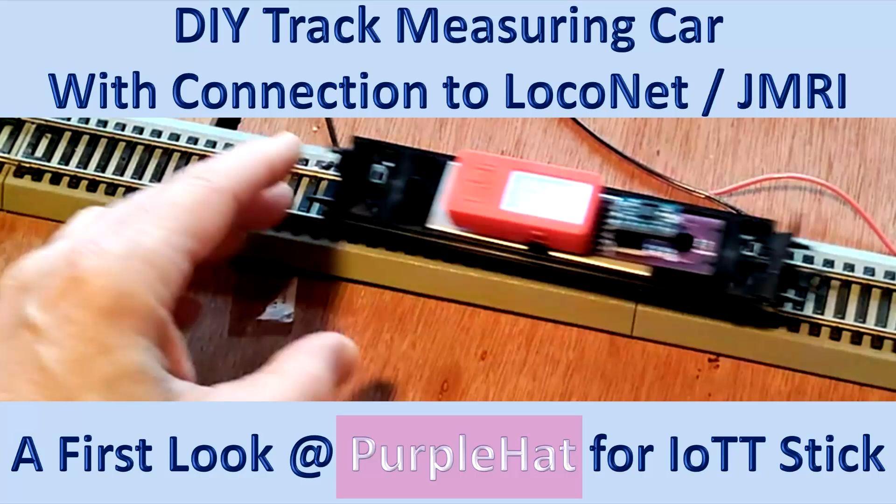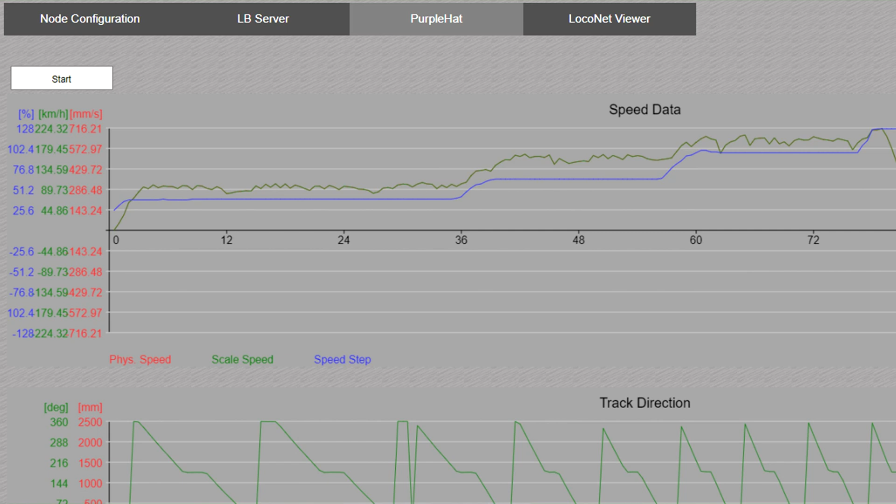I am kind of excited about how this new PurpleHat track measuring sensor for the IoTT stick is performing. In this video I show you why. And if you watch to the end, you will see what additional features are still in the makings.

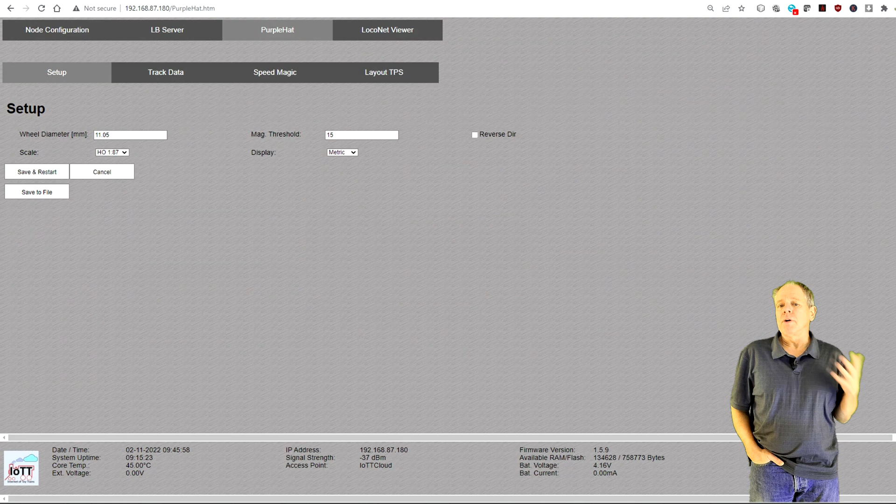I am Hans Tanner. In the last video I showed you how to install the sensor magnets on the axle of N and HO scale cars. Today I am showing you how to install the sensor inside of the car, how to configure it and what data you can get. I am using an HO scale car to demonstrate, but it works exactly the same way for all the other scales.

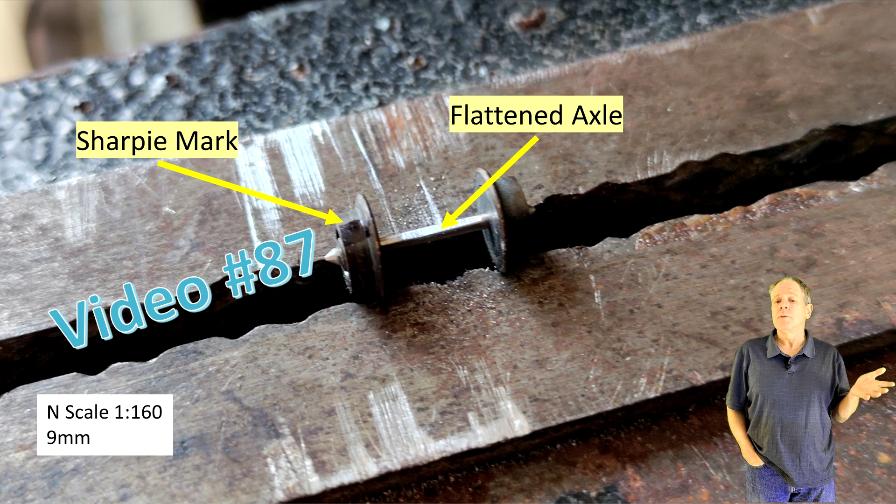If you found the installation of the magnets easy and doable, then the installation of the sensor is a piece of cake. I made this PurpleHat PCB I quickly showed at the end of the last video, where the 3D Hall sensor is soldered on. It also has the solder pads for the IMU board, but on this prototype I installed pin headers so that I can easily swap the IMU board.

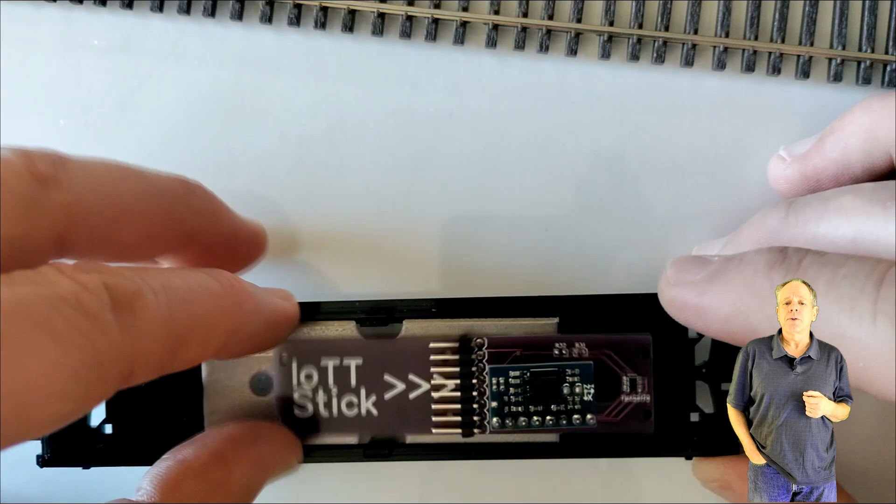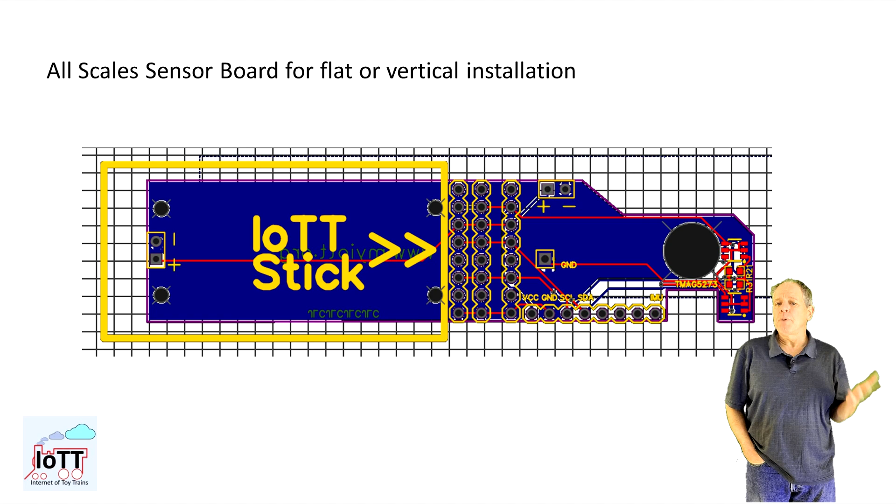To the left are the soldering pads for the IoTT hat connector, so the IoTT stick is simply connected to the hat, then placed above the axle with the magnet, and the track measuring car is ready to go. Now, in the time since the last video, I have put some more efforts into board development, and this is how the next generation of the board is going to look.

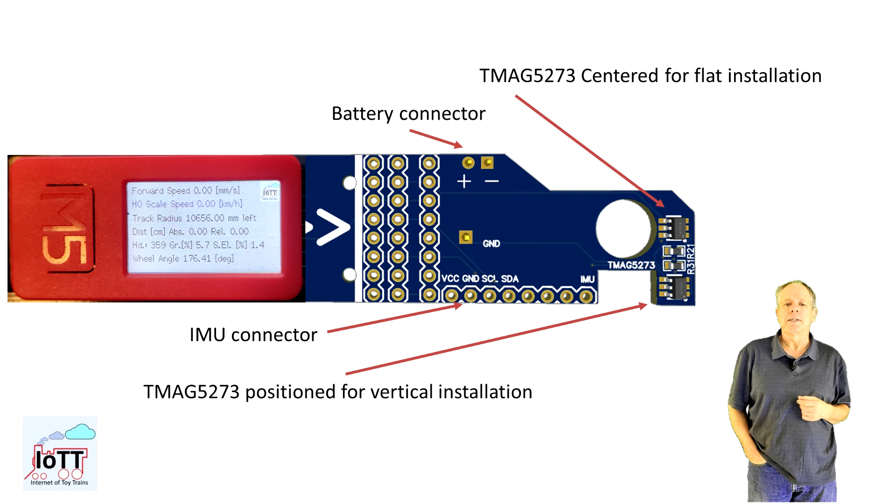The most important change is that it now has two sets of soldering pads for the Hall sensor. This allows to install the board vertically with the sensor still as close to the axle as possible. That way the board fits into an N-scale car and the IoTT stick display can be read through an opening in the sidewall of the car. But that I will show in a future video once I have the modified boards available.

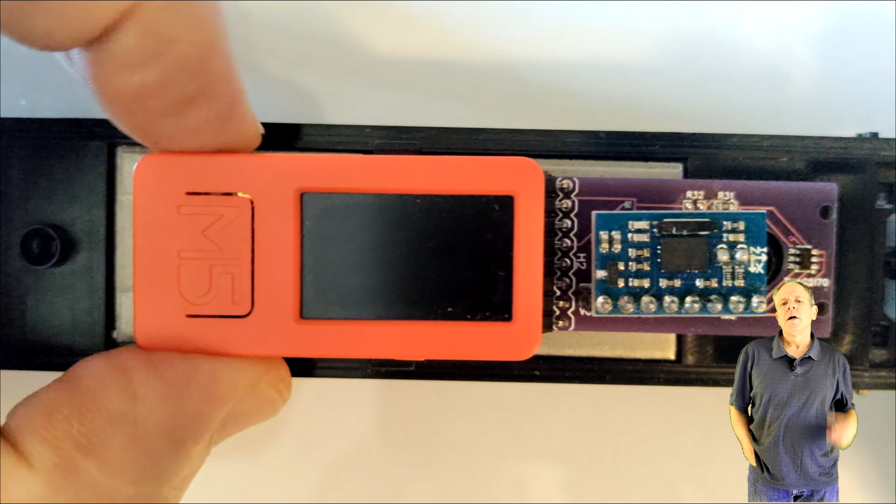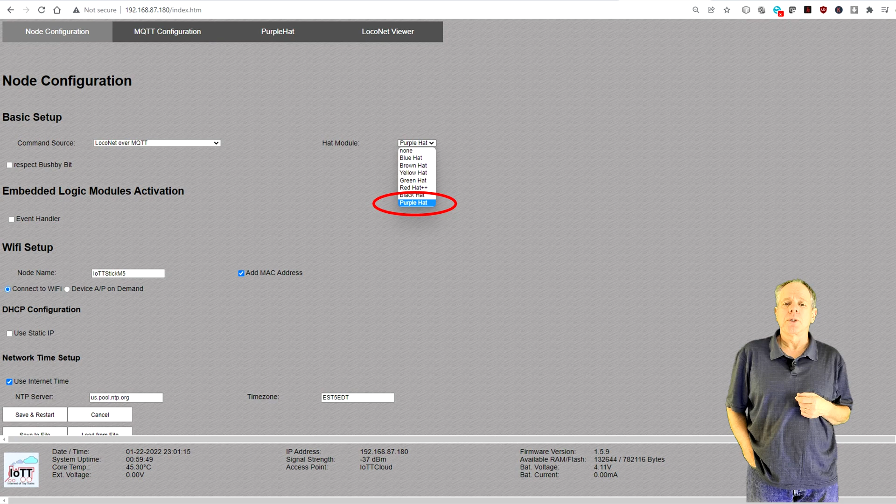Once the sensor board is installed, you can switch on the IoTT stick, connect it to your Wi-Fi or configure it to act as access point as shown in video number 42. Then you can point your browser to the IoTT stick and load the node configuration page. On this page you first select PurpleHat as your function module. Then you select the communication interface according to your setup.

With the PurpleHat you can currently use the options None, Loconet over MQTT or LocoNet lbServer Client. Select None if you want to use the PurpleHat as a standalone measuring sensor without connection to a command control system. Loconet over MQTT can be used if you have a Loconet to MQTT gateway installed that sends the Loconet commands to an MQTT broker.

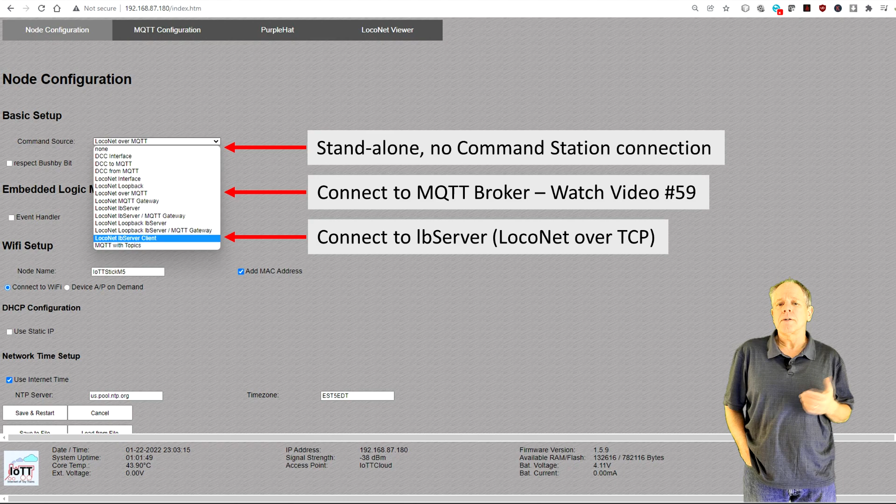The LocoNet lbServer Client option lets you connect to any LocoNet lbServer, for example the lbServer built into JMRI, or an advanced command station like the Digikeijs DR5000. Connecting the measuring car to a command station network is not necessary for basic operation, but it allows for some nice additional features I will show you in a minute.

Once you have configured the IoTT stick to use PurpleHat, the web browser will display the PurpleHat tab. Click the tab and after opening the page, the first tab on that page covers the basic setup of the sensor. Here you can set the technical details to operate the device. The first and probably most important input is the wheel diameter. Measure the diameter of the wheel of the axle the magnets are mounted on and enter it in this field. The dimension is always metric, even if you configure the stick to display imperial dimensions.

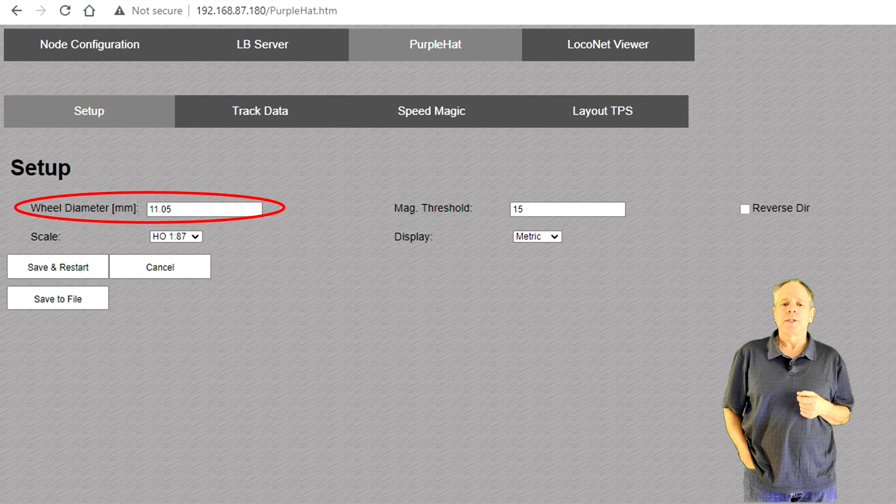The best way to measure the data is using calipers and measure the wheel directly. Since the running surface of the wheel is conical, the best place to measure it is about halfway between the start of the flange and the outer side of the wheel. Keep in mind that the wheel diameter is used to calculate the travel distance of the car, so setting a correct diameter directly impacts the precision of the distance measurement.

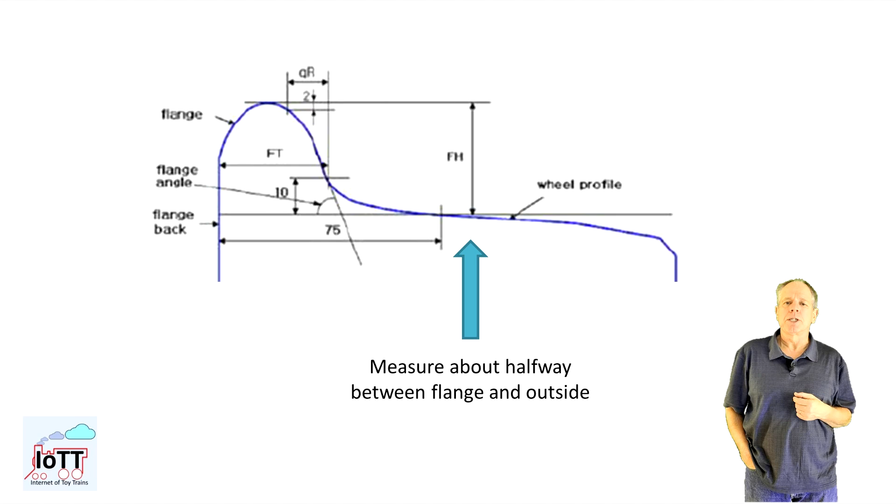The second entry is for the magnetic threshold. Depending on the strength of the magnetic field, the measurements oscillate around the true value, even if the car is not moving. This oscillation would be interpreted by the software as constant small movements and change of direction. To avoid that, the threshold allows for specifying a rotation angle that needs to be surpassed before the sensor is interpreting it as a change of the travel direction of the car.

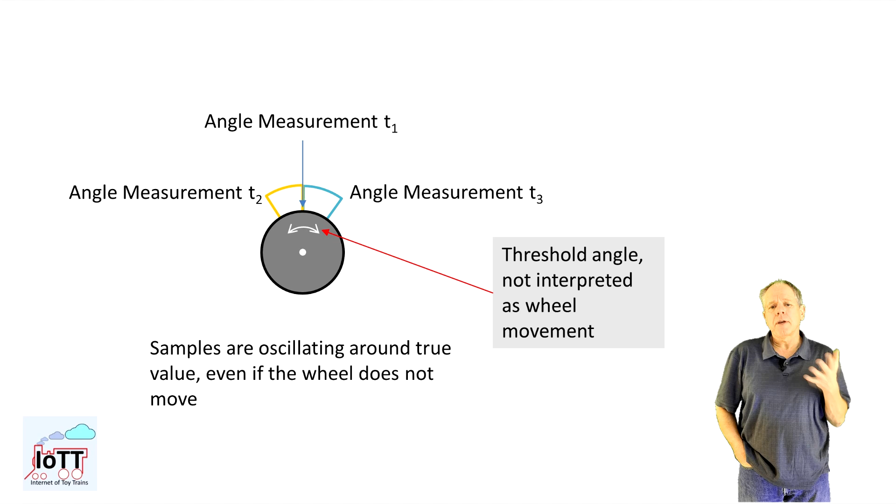So, the stronger the magnetic field, the less oscillation and the lower the threshold value can be set. Very weak signals cause wider oscillation of the measured value, and therefore the threshold should be set to a higher value. Based on my tests so far, 15 might be a good starting point for most applications.

But if the car is not moving, but then still continuously displaying changing speeds, you should try to increase the threshold value to make the sensor less responsive. This might be a good time to have a quick look into the software algorithm that performs the distance measurement. If you are not interested in that technical stuff, simply skip to the next section.

The TMAG 5273 can do up to 1000 measurements per second, but it also offers the possibility to average the results of several measurements and read it out less frequently. I have set it to average the last 32 readings, which already eliminates a lot of the typical oscillation. In turn, the maximum sample rate is down to 400 readings per second, which is still more than what I do. The stick is configured to read the angle every 5 milliseconds, so 200 times per second.

I then compare the new angle to the previous one and determine how much the wheel has turned. This is multiplied by the wheel diameter times pi, which gives me the travel distance, and divided by the time between two readings, the speed. So I get a new speed reading every 5 milliseconds, which then gets smoothened over half a second, which is then the result that is displayed.

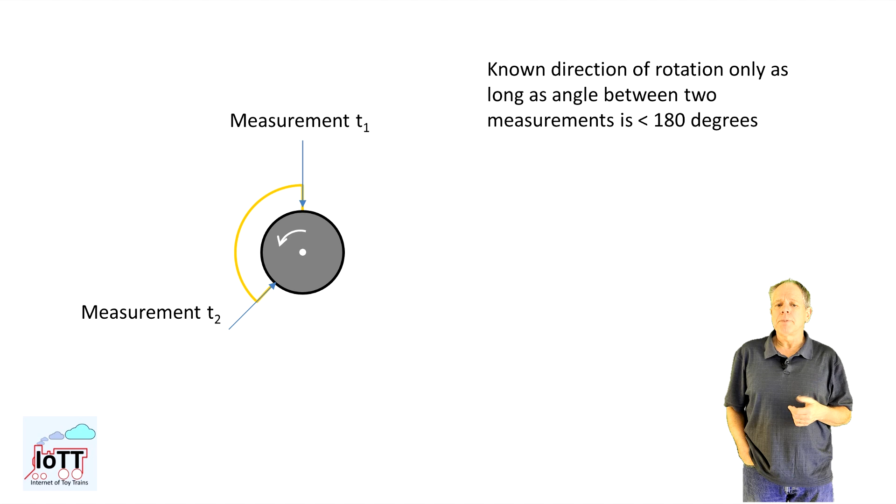Now the interesting question is, how fast can the car travel and still provide an accurate measurement? Well, to reliably detect the speed and direction of the rotation, the angle between any two measurements must be less than 180 degrees. And with the typical reading errors, I think the measurement is reliable as long as I have 3 or more samples per revolution, which gives a minimum time of 15 milliseconds per axle revolution, or about 67

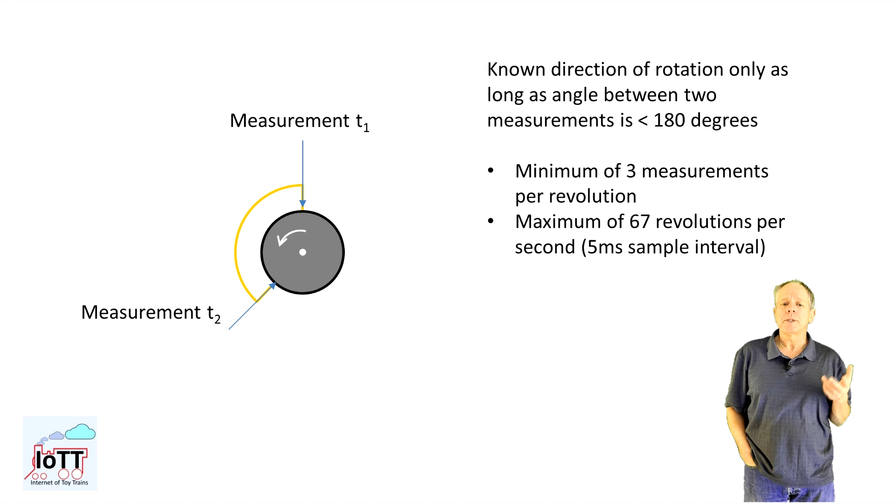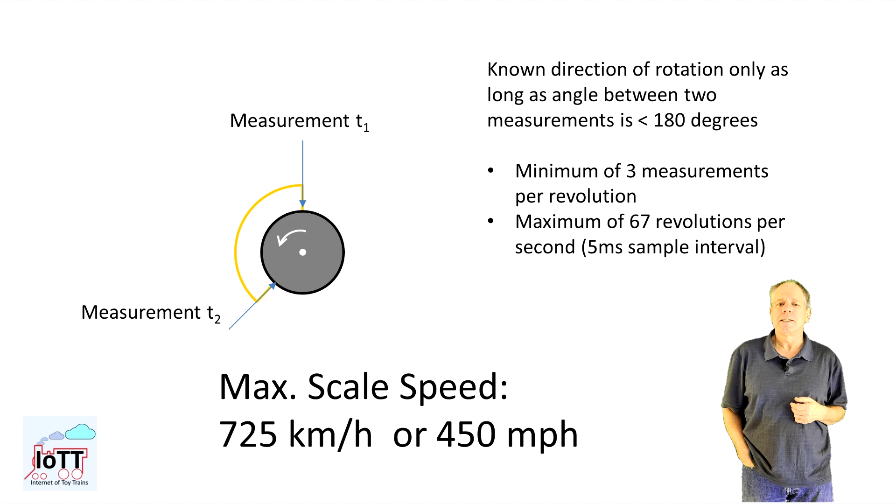revolutions per second. With a typical wheel diameter of 11 mm in HO scale, this is equal to a speed of about 2300 mm per second, or converted to scale speed, about 725 km per hour or 450 miles per hour. So this should be enough even if you are modeling the German ICE railway system. And with that, back to the configuration screen.

The reverse dir checkbox lets you change the travel direction the car interprets and displays as forward moving. You can use this to synchronize the indicated direction with the direction the locomotive is traveling. Of course, alternatively, you could simply turn the car 180 degrees for the same effect. It's up to you. On the second line, you have the drop-down boxes for scale and dimension. Select the scale of your application from the list.

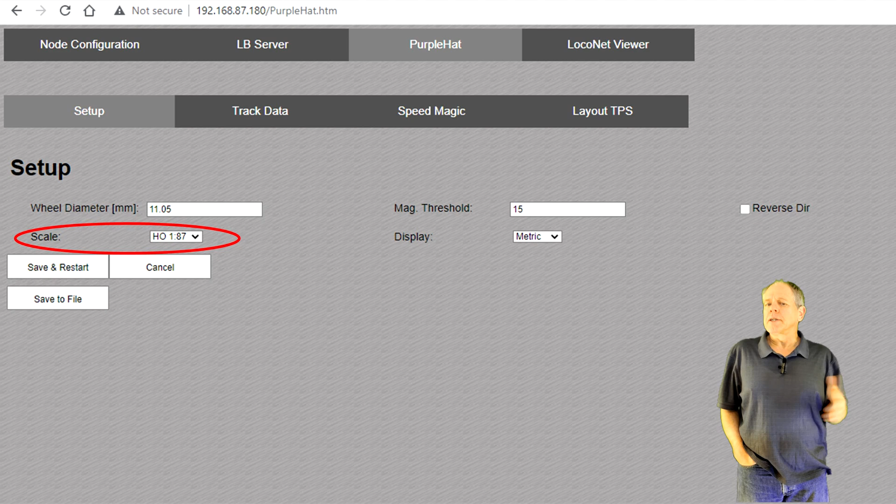The information is used to calculate the scale speed based on the physical speed as measured by the sensor. So if you set this to HO, the physical speed as measured is multiplied by 87 and then converted to either kilometers per hour or miles per hour, depending on the selection you make from the dimension drop-down list in the next field. And that's all the settings you need to make to configure the sensor. Click Save and Restart to make the changes permanent, and you are ready to roll.

If you now check the display on the stick and use the main button to rotate through the different pages, you get to a page that shows all the sensor measurements for speed, distance, heading, grade and super elevation. If you are using a regular stick C, that's it. In case you are using the newer stick C+, you will get an additional line that has the current rotation angle of the measured axle.

This allows for very fine measurements of the movement, but it requires the larger display of the stick C+ with higher resolution. Another advantage of the stick C+ is the higher battery capacity. With the stick C+, you will be able to operate the sensor with activated Wi-Fi for about half an hour, while on the regular stick C you will only get about 15 minutes before it needs to be recharged.

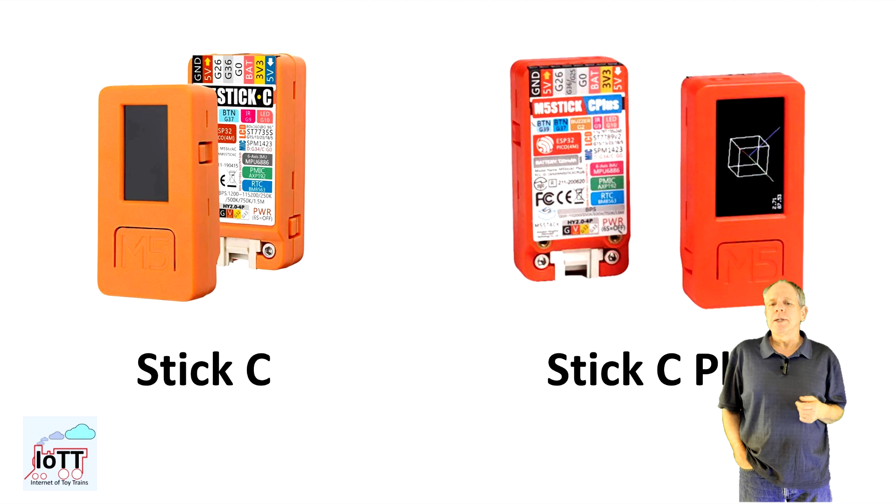For this reason I have added a battery connector to the latest PCB version so that a small lithium-ion battery can be connected to the board. For my tests I was adding a 450 mAh 3.7 volt battery and got a runtime of about 6 hours, which should be sufficient for most applications.

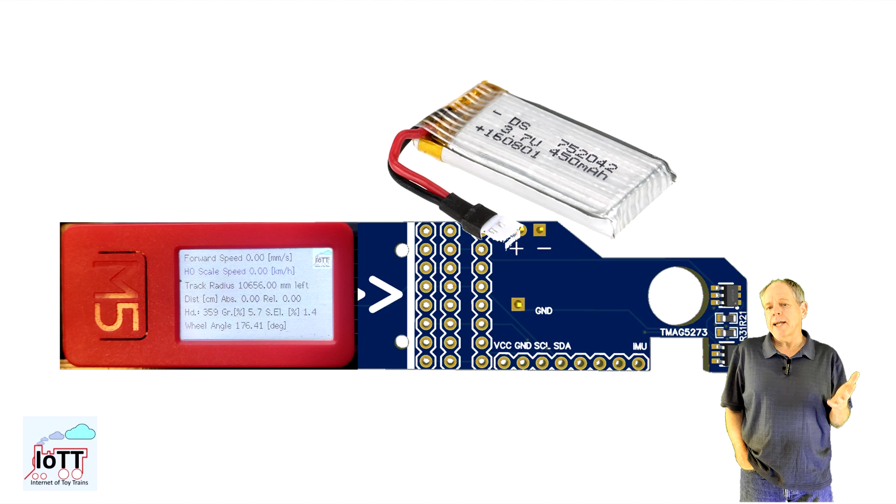And finally, it is also to say that M5 Stack, the company who makes the stick C, has now completely switched to the Plus version and does no longer make the regular stick C. I have currently 2 or 3 left, and after that I will also only sell the stick C+.

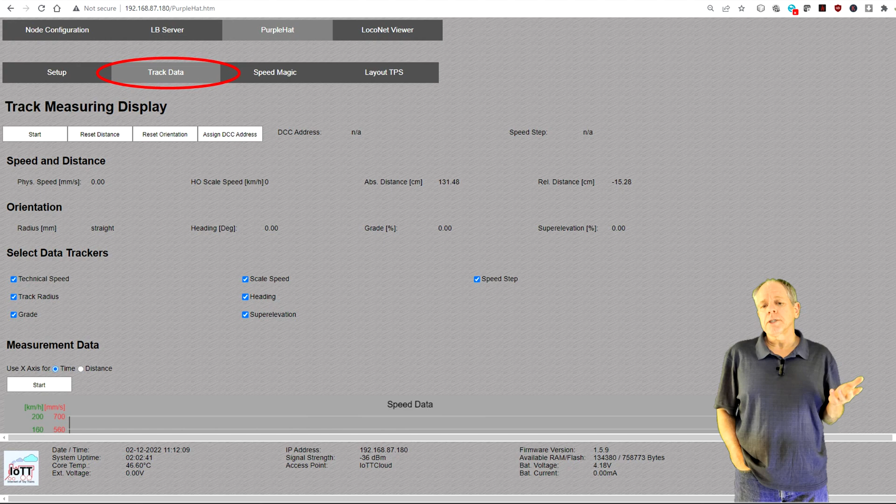To see the results in the browser instead of on the stick display, open the Track Data tab. Here you first have 4 buttons to control the sensor data flow. The Start button is used to start and stop the data display in the browser. Note that the sensor keeps measuring in any case, and the current data is always displayed on the stick display.

The Start button only controls the transfer of data to the browser display so that you can stop the flow to study the data in detail. The next 2 buttons allow you to reset the display on the fly.

Reset Distance sets absolute and relative distance to 0. Reset Orientation, on the other hand, resets heading, grade and super elevation. Note that this is basically just setting the values for what the IMU considers north, flat and level based on the current position, so it impacts the display of heading, grade and super elevation.

The final button lets you make a connection to the locomotive that is pulling the measuring car. Click the button, then issue a speed or function command from your throttle to the loco address and it gets paired with the PurpleHat via LocoNet if LocoNet is selected in the node configuration.

If the sensor knows what loco address is used for the train, it can display the speed step that currently is set in the locomotive. That's what you see in the next 2 fields, the assigned DCC address and the current speed level of that address. The next section shows the speed and distance information.

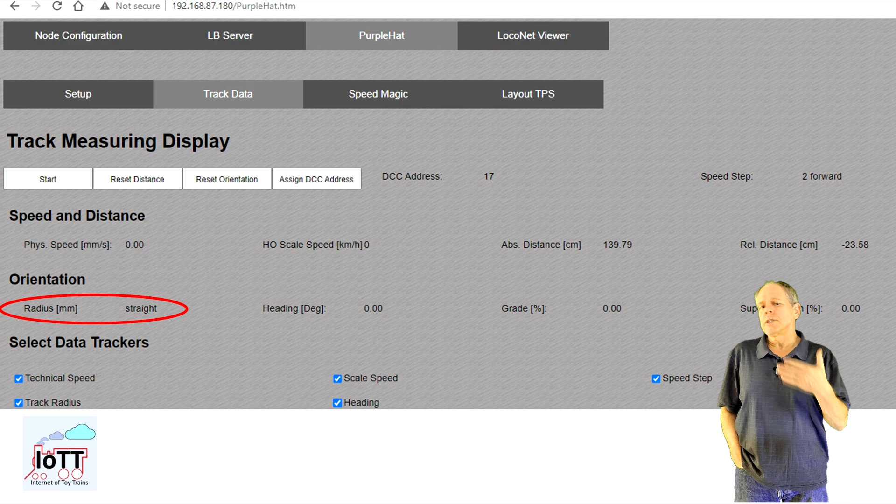The next section shows curve radius and orientation of the car. If the car is traveling through curves of more than about 7 feet radius, the display shows straight. If the radius is smaller than that, it is displayed in this field. Heading shows the current travel direction, with 0 being the direction the car was in when the sensor started up or when the reset orientation button was clicked the last time.

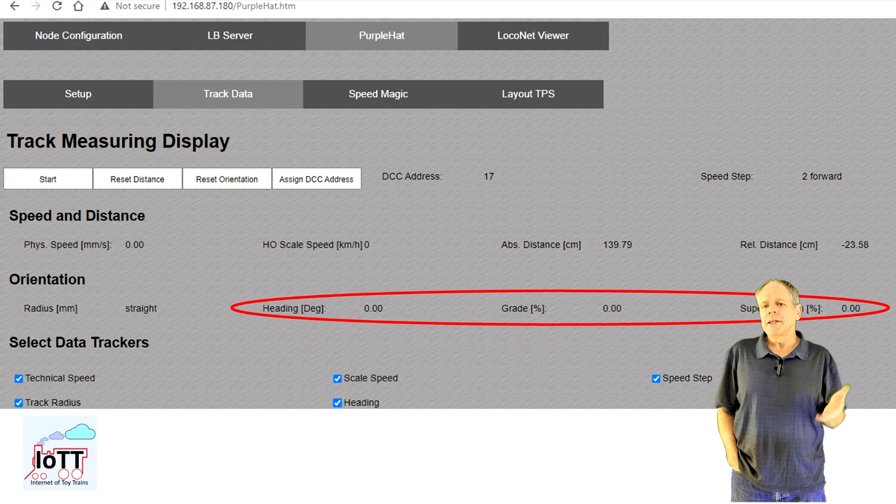Grade shows the grade of the track, positive numbers if it is climbing and negative numbers if the car is moving downhill. And super elevation shows the banking, with positive numbers if the track is leaning to the right and negative numbers the other way around. Like the grade, these values are always related to the current travel direction.

That is basically all the data the sensor can measure, and all there is in the lower half of the page is the graphical display of the same data, and you can use the checkboxes to select or unselect individual line graphs. The first box has physical speed, scale speed and speed step as measured during the last 120 seconds.

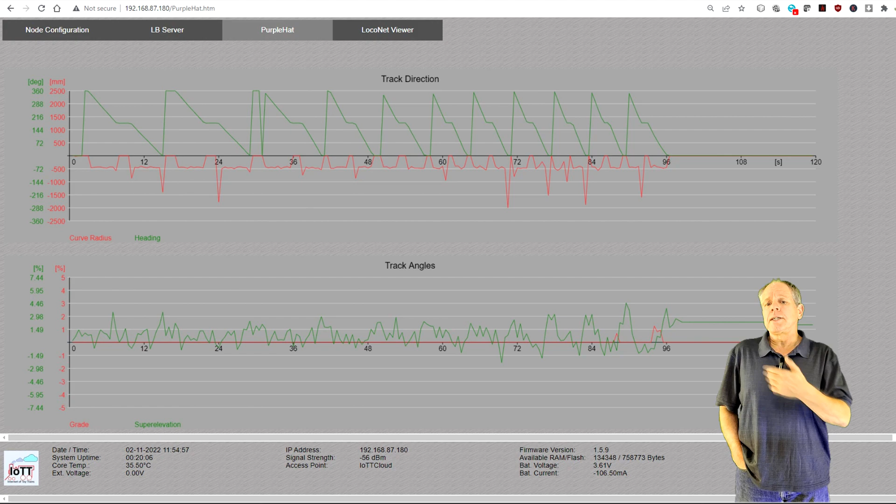The second block shows curve radius and heading, while grade and super elevation are shown in the third set of line graphs. Note that the second two blocks are only available if the sensor is equipped with an IMU. Without an IMU, the sensor can only measure and display speed and distance data. So let's see what we can get when we operate the sensor.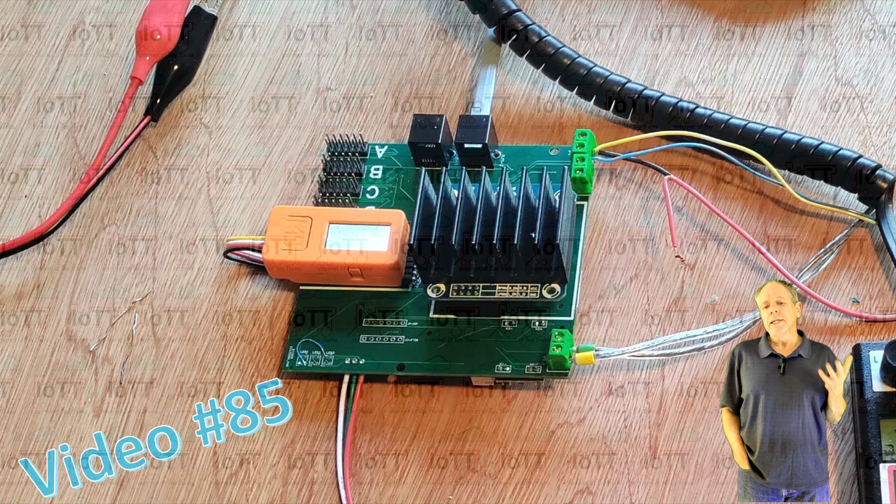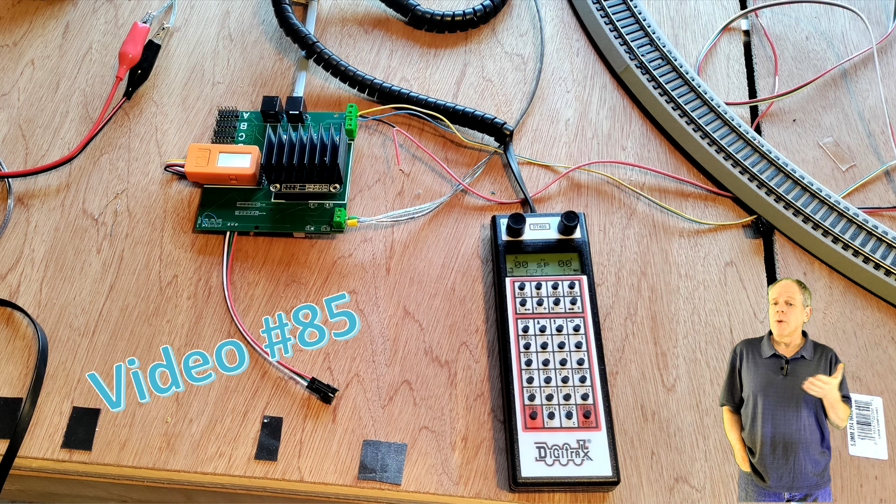For this test I am using the Red Hat command station prototype I introduced in video number 85, which makes the DCC++ Arduino software a LocoNet command station. To control the locomotive, I am using a Digitrax DT400 throttle.

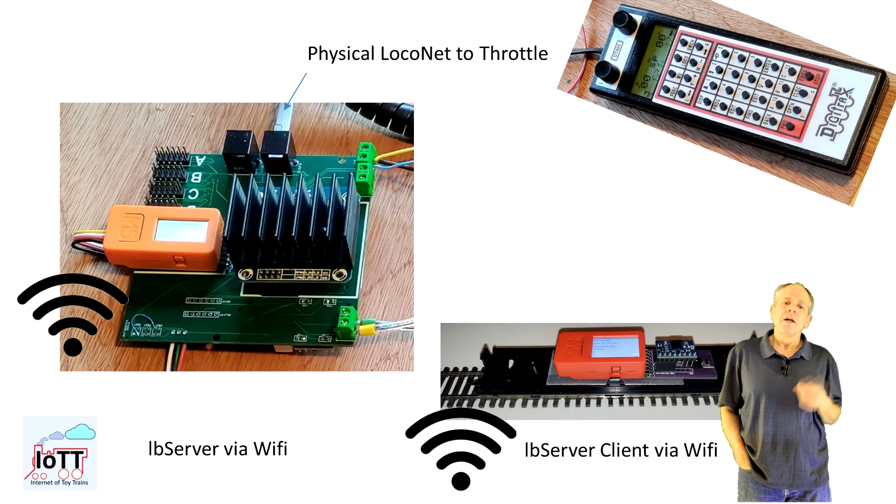The command station communication is configured to LocoNet LB server, so it provides a physical LocoNet for the throttle and LocoNet over TCP. The PurpleHat sensor is configured as LocoNet LB server client and connected to the server of the command station, so it receives all LocoNet commands via Wi-Fi. First, I assign the locomotive address by clicking the Assign button and then turning the knob on the handheld throttle, and the address is assigned and displayed.

The track is a simple oval using Bachmann EasyLine track. The curves are using 18-inch radius sections, and the straight parts consist of 3 track pieces of 9-inch each. So the nominal length of the track is about 167 inches or about 4 meters and 24 centimeters.

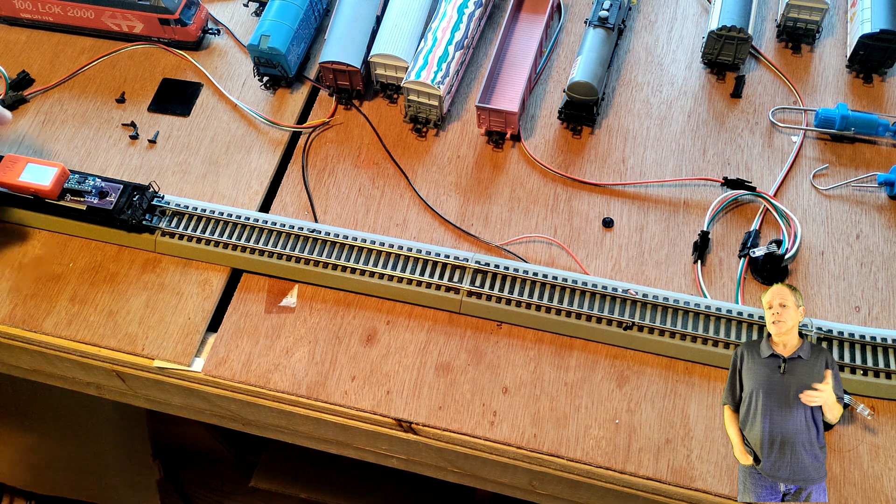I first do a distance measurement by pushing the car over 2 sections of straight track. The nominal distance is 18 inches, which is 457.2 millimeters. So I place the car with the bumper plates at the rail joint and reset the distance indicator. Then I push the car down the track and stop it exactly after 2 sections. 454.6 millimeters, that is a difference of 0.6%. I then repeated the test several times, always with similar results.

Now, the smallest difference between theoretical and measured value is to be expected when traveling on a straight track, so this is the optimal case. As soon as the car travels through curves, the tolerances will increase as the wheels tend to slip once in a while, particularly on my bumpy test track. So let's try it out.

I place the train on the track behind a locomotive and reset the distance counter of the sensor. Then I let the train do a complete loop and stop it at the very same location. Here is the result.

421 centimeters compared to a theoretical value of 424. That is pretty close. In fact, the deviation is about 0.7%.

Now, if you get larger deviations than say 2% and it is systematically too low or too high, you may want to adjust the diameter of the wheel in the sensor setup. Increase the diameter to get a longer distance measurement and vice versa. Keep in mind that every millimeter you add to the wheel diameter adds 3.14 millimeters per revolution to the measured distance. Now let's look at speed measurement.

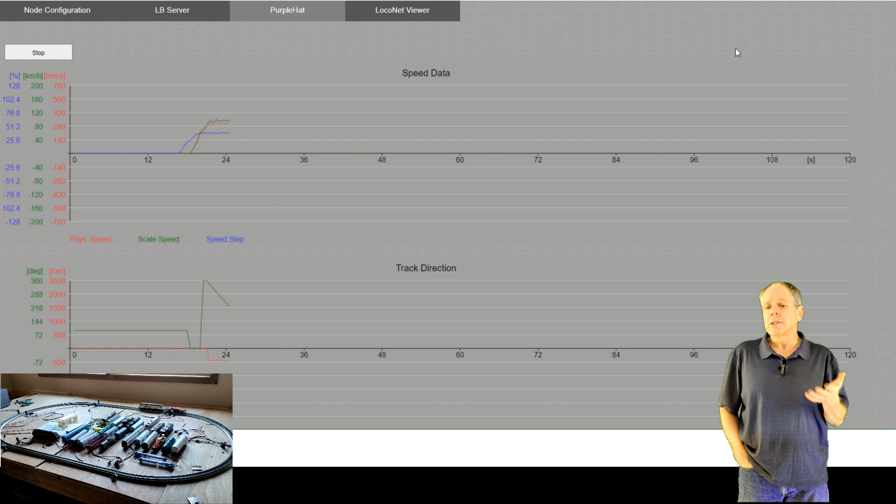Here is what I do. I let the train run 3 consecutive laps at constant speed and measure the time it takes. I use 3 lap runs to minimize the measuring errors at the beginning and the end of the run. Next, I calculate the theoretical speed and compare it to the speed that is displayed on the sensor.

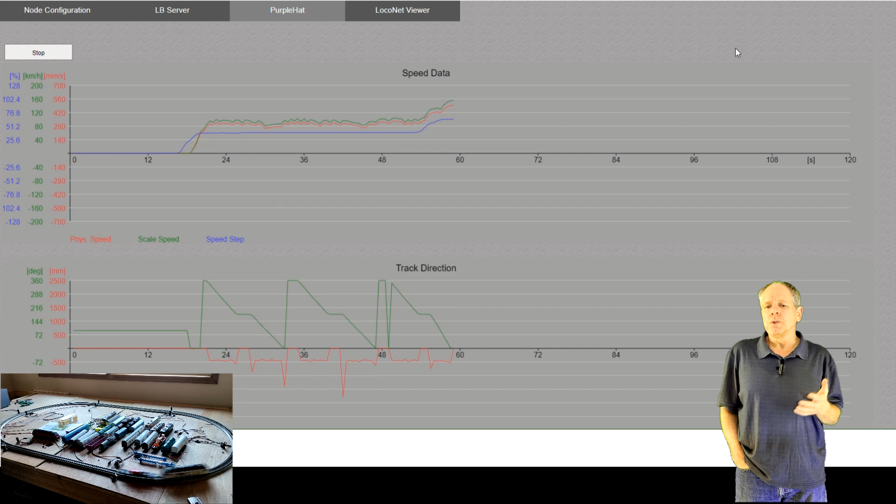Of course, the measured speed is not constant. It is oscillating as the car pulls or pushes a little bit and sometimes jumps over rail joiners, causing the wheel to lose contact with the rail and slow down, and so on. So I watch the values and write down the highest and lowest and use the average of them to calculate the speed. This is not very precise as it does not really account for the speed losses in the curves, but at least it is an indicator.

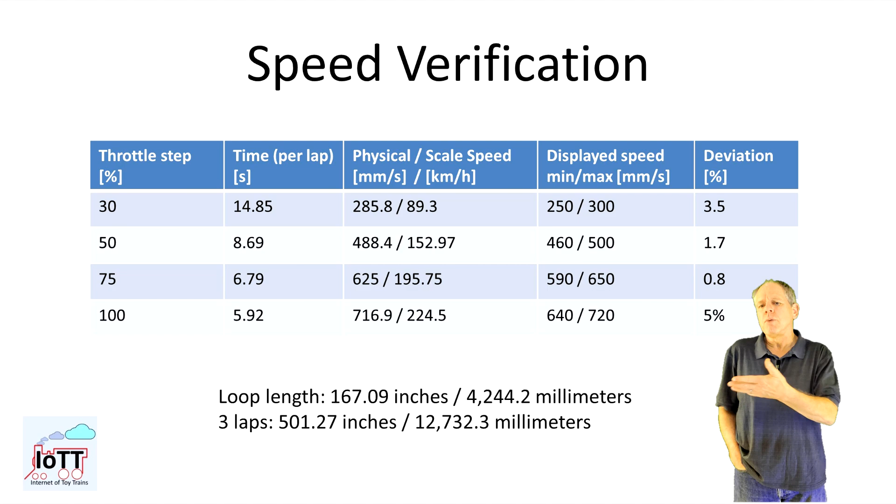I repeated this test for different speed step settings, and here is a table of all the results. As you can see, the measured speed is consistently within a few % of the timed values, so that's pretty good as well. Only at the 100% setting, the deviation is growing a little more towards the lower side, which I think comes from the car losing contact to the rail more often at this high speed.

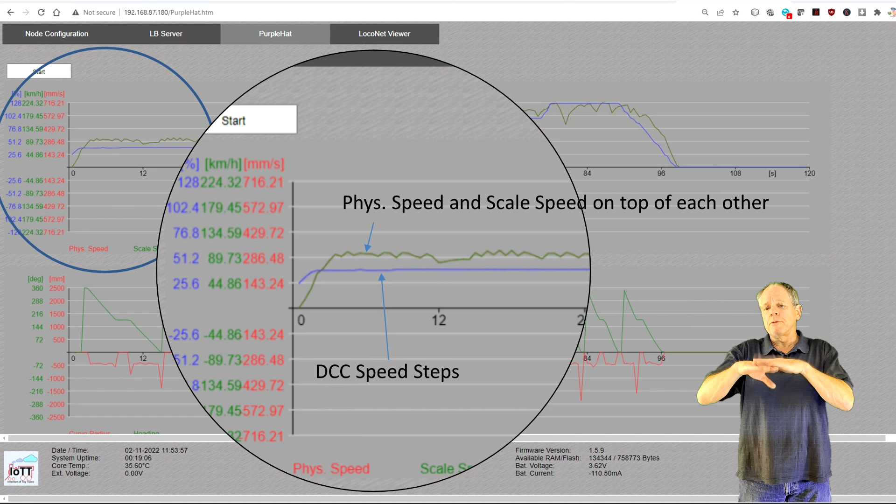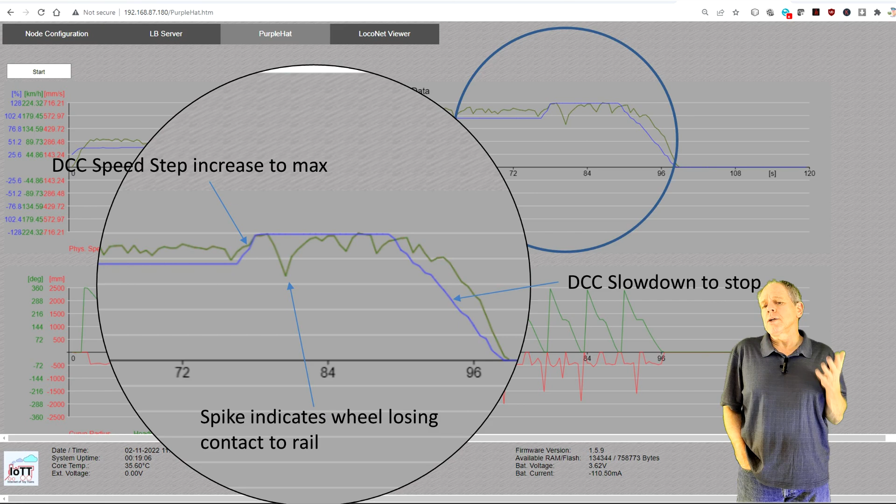Looking at the graphs, you see how the speed is related to the speed step the locomotive is running at. The graphs for physical speed and scale speed are on top of each other due to the scaling of the y-axis of the graph. At the top speed, we can see that negative spike, which I believe comes from the wheel losing contact with the rail. We can clearly see that the speed graph is much more dynamic at the highest speed, but then that is a scale speed of about 225 km an hour, so I don't worry too much about that.

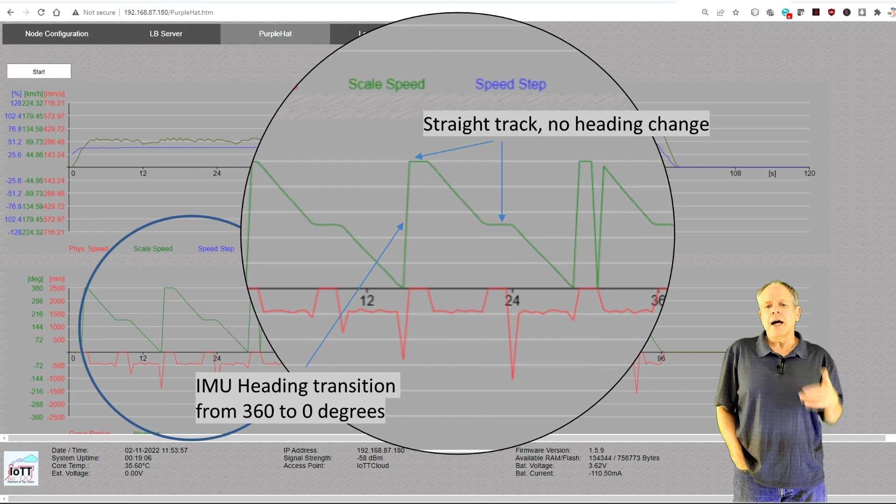In the heading graph, you see the heading changing from 0 to 360 degrees as the locomotive goes around the track. If the curve is horizontal, the train is on the straight section. The slopes indicate that heading is changing, that is when the car travels through the curves. And you see how the time for a complete cycle gets shorter with higher speeds.

The radius display shows a radius of around 440 mm for the times the car travels through the curves. This compares to a theoretical value of 457 mm for the 18-inch curve, so it is pretty close as well. Note that the radius is not displayed while the track is straight because it's infinite. But you typically see how the value comes from infinity to 440 mm and then disappears towards infinity again once the curve ended. When this happens, the curve display should be suppressed. That is an error in the software I need to correct. When fixed, you will no longer see the radius graph when the track is straight.

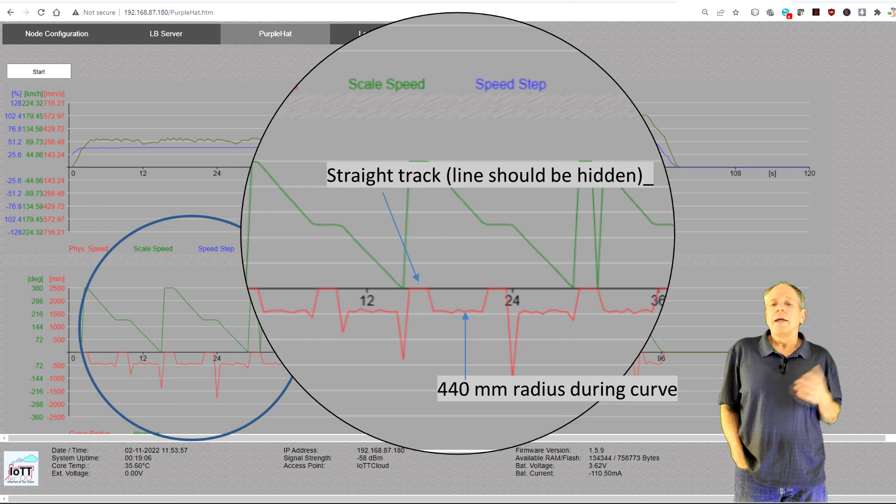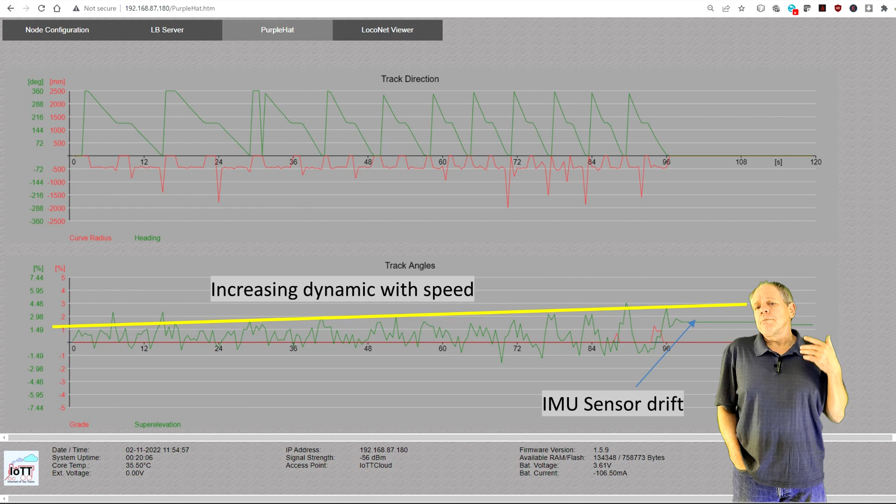The grade line in the last block is flat, as it should be, but the super elevation line shows some bouncing of the car. And at higher speeds, we see the increased dynamic that comes from the centrifugal force as the car goes through the radii. However, this data is not very reliable as I am still using the same IMU I used in video number 82, which most likely has a drift problem on the axis. But due to the ongoing chip supply crisis, I have not been able to get the replacement for a price I am willing to pay, and the problem has to wait for the moment. So that is the information you can get from the Track Data tab.

Now, of course, you probably already figured it out. If you can precisely measure the speed a locomotive is traveling at, and you can relate it to the speed step the locomotive is set to by the command station, maybe it is then somehow possible to use this system to support speed matching of locomotives. Well, I guess that is true, and this is exactly the functionality we will find in the next tab, which is labeled Speed Magic, and I will tell you more about it in the next video, so stay tuned.

For today, that's it. I hope this video was interesting for you and you are as excited as I am about the simplicity of the PurpleHat sensor board and the quality of the measurement data we get out of it.